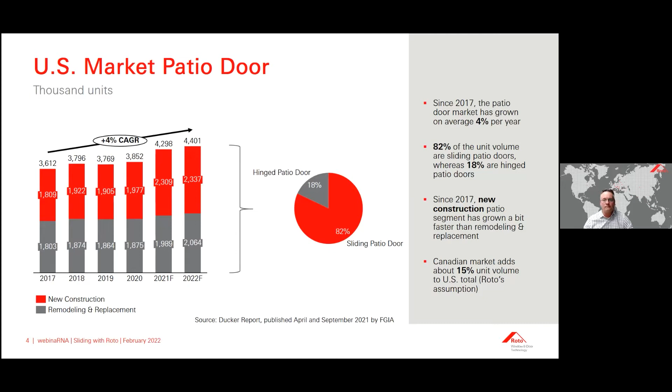Now, if we hone in on the sliding patio door market, it's very interesting to note that from 2017 to 2019, the sliding patio door market grew at 5% per year. And we believe 2020 and 21 will be shown to have grown at a much higher rate. The next Ducker report we expect will be released in the coming months. 26% of the sliding patio doors are multi-point hardware, and this number is increasing based on the growing demand for higher performing doors.

It's interesting to note that patio doors are growing at almost 2 times that of windows in North America. And the vinyl PVC frames account for about 2/3 of the unit volume. It's also important to note that in Canada, it is common for a window manufacturer to purchase their sliding patio doors from a PVC extruder. This is much different in the United States, whereas most window manufacturers will produce their own sliding patio doors. And again, we make the assumption that the Canadian market adds about 15% to the US volume numbers.

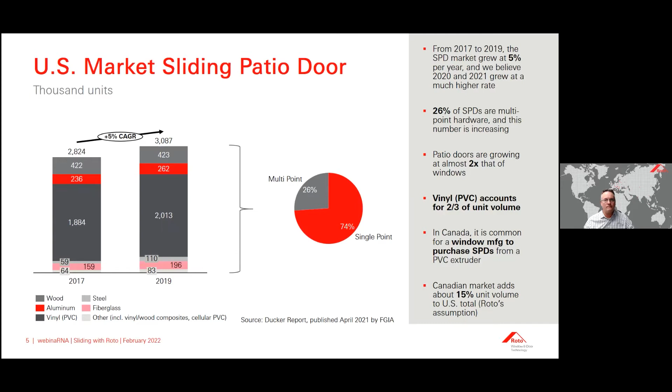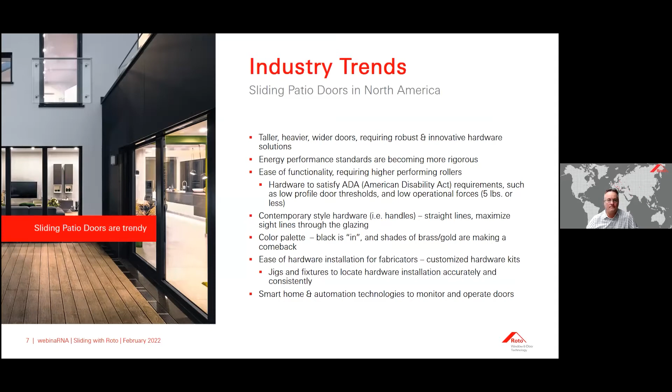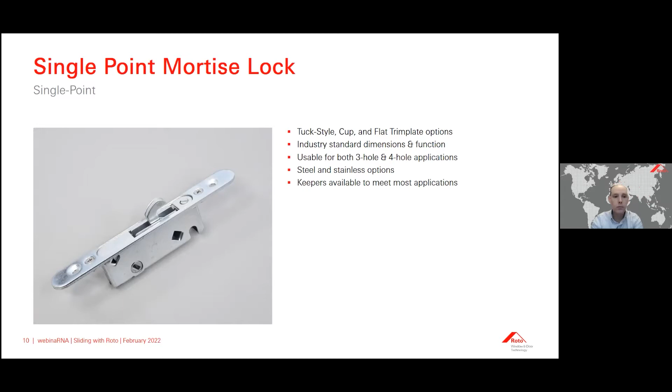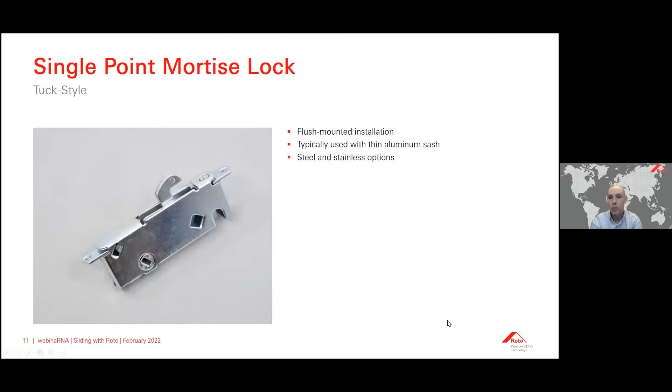Tuck style: this is a flush-mounted installation typically used in thin aluminum sashes. It reduces the gap between the keeper and the sash when needed. Cup trim plate: where a cup trim plate is possible, it pushes the hardware deeper in the sash, allowing more overlap of sash and frame and preventing handle and frame contact. Typically, this is used on a deeper backset, such as vinyl or wood profiles.

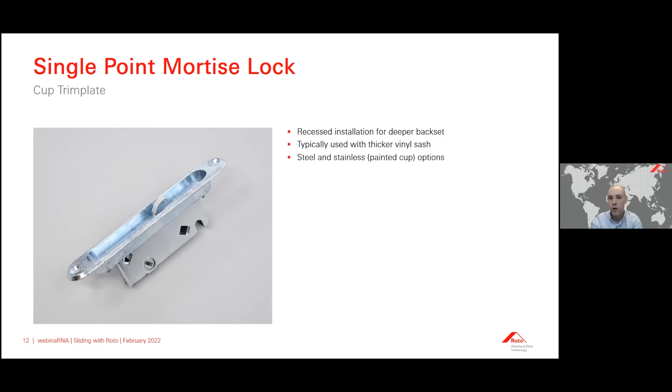And flat trim plate: surface-mounted installation is most common. Two screw hole patterns, highlighted in the pictures shown, are available to replace the majority of existing hardware applications.

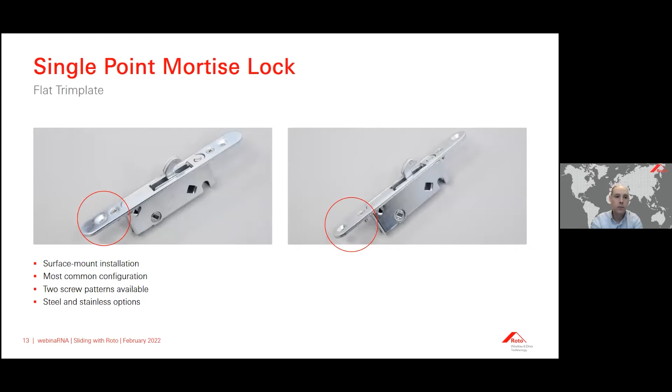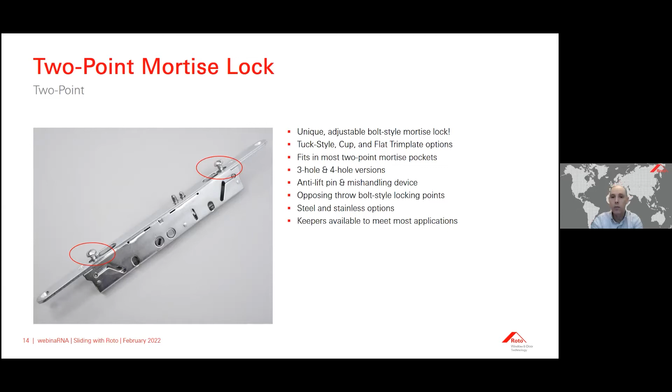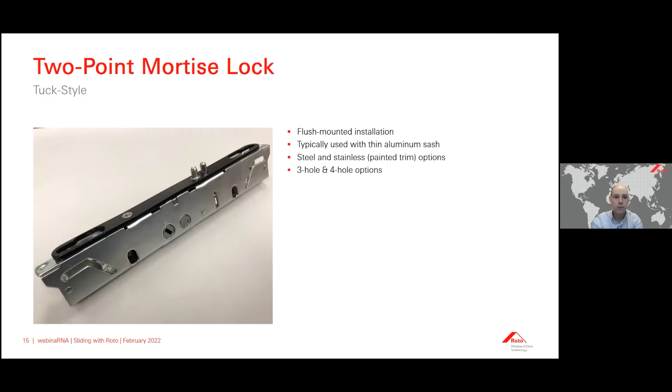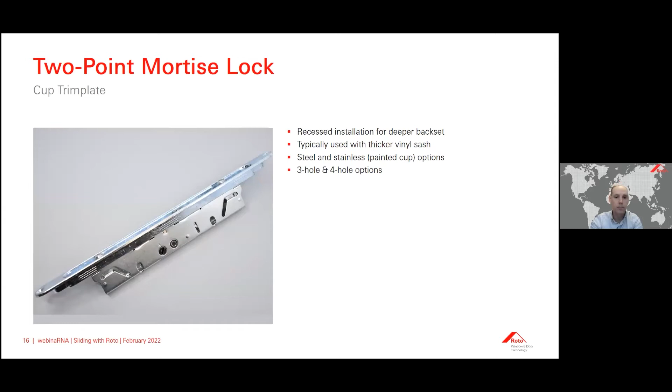Tuck style, as with the single point, flush mounted installation typically used with thin aluminum sashes. Cup trim plate, where a cup is possible, pushes the hardware deeper in sash, allowing more overlap and preventing contact. Typically used on deeper backsets in vinyl and wood. And flat trim plate, definitely the most common surface mounted installation, and the footprint fits in most existing hardware applications.

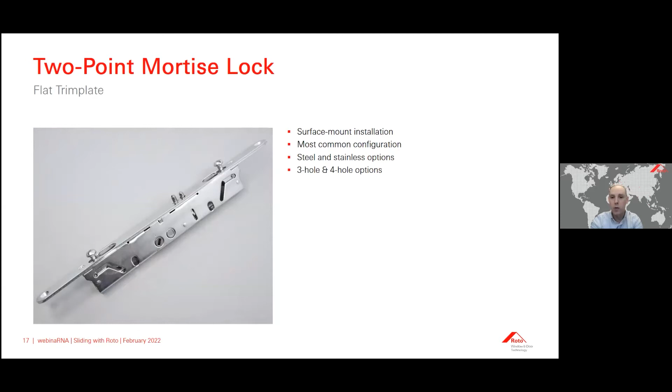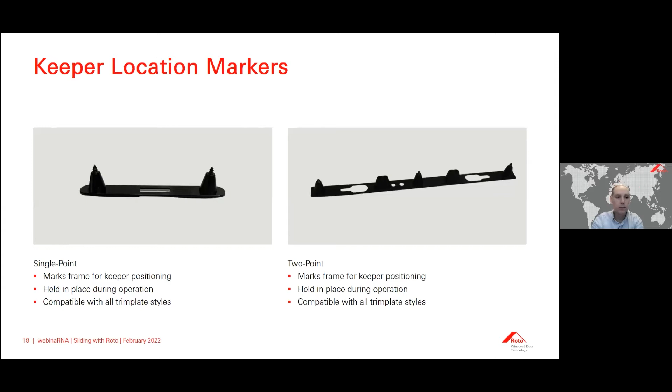We also provide keeper marker locators. They're usable when keepers are not installed in the factory. They easily mark the frame for keeper installation in the field. Next up, we'll look at our 2-point operation and keeper marker installation video. If you just want to start the video.

So as you can see in the video, the bolts rotate outward in opposite directions for maximum security. An anti-lift pin and mishandling device prevent operation if the door is not in closed position. The keeper marker is easily installed by rotating the thumb turn to secure the marker in place. Simply closing the door will stamp screw hole positions on the frame. Retract the bolts to release the marker.

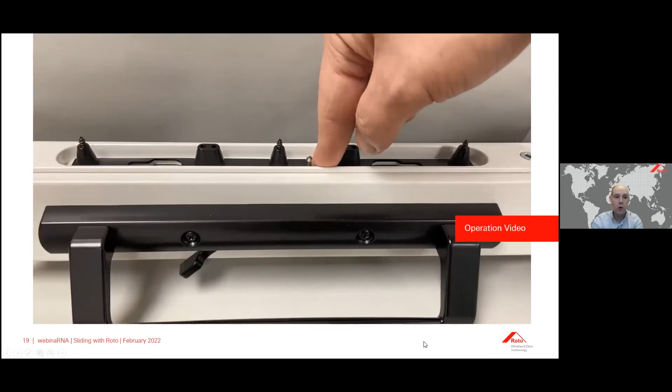Next up, handles. Handles are zinc die cast and powder coated at our Mississauga, Ontario, Canada warehouse. Architectural finishes are imported and stocked in Mississauga as well. A variety of visibly familied series of handles exist with keyed, non-keyed, and dummy options available.

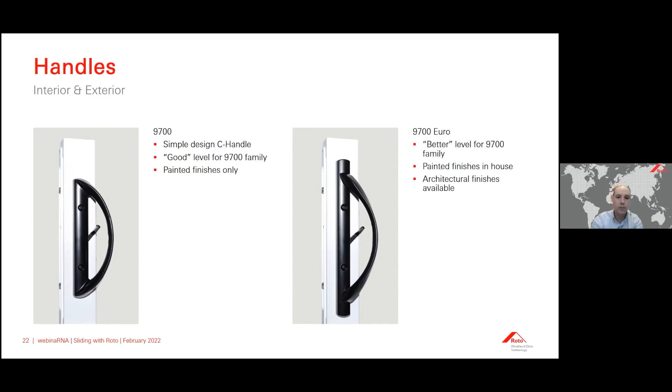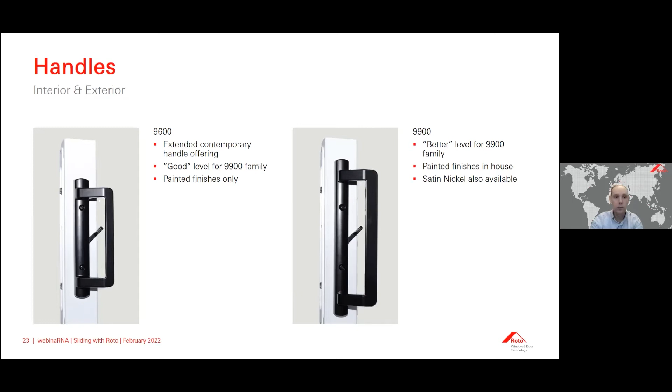As doors are becoming larger and heavier, more robust hardware options become necessary. Our 9100 family accomplishes this. The 9100 offers slim form factor and is compatible with magnetic blinds, allows greater sight lines, more glass, and wider opening while still providing a pronounced contemporary handle suitable for larger doors.

The 9100D is a more robust full D handle when trends for larger and heavier doors are becoming prevalent. Both options are available in powder-coated finishes and satin nickel finish.

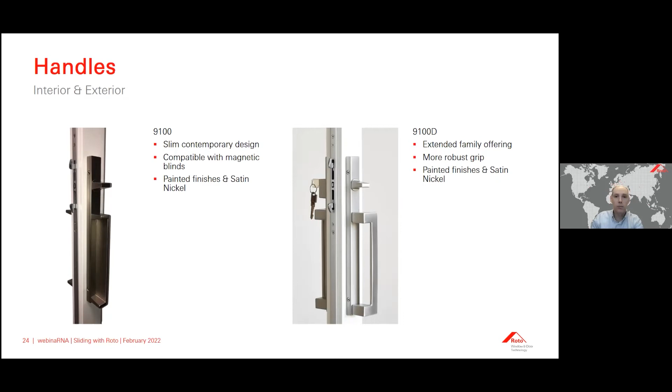We also have an array of exterior handle options. Exterior finger grips have a slim form factor, allowing greater sight lines, more glass, and wider opening. An angled finger grip version slants the keyhole away from the frame. These are available in powder-coated finishes.

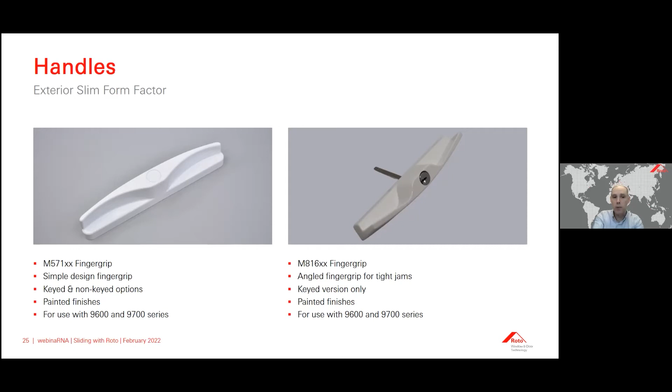Exterior low-profile finger grips have a slim form factor, allowing greater sight lines and wider opening. They also have a shallow depth, which prevents contact with screens. Available in painted finishes.

Next up is rollers. We have a couple main end adjust rollers. Our two most common end adjust rollers are the 21000 and 21009 series. Both have a 1 1/4 inch wheel. The 21000 is end mount, and the 21009 has mounting tabs on the housing for securing to bottom of the sash. Adjustment with both is with the Phillips driver bit.

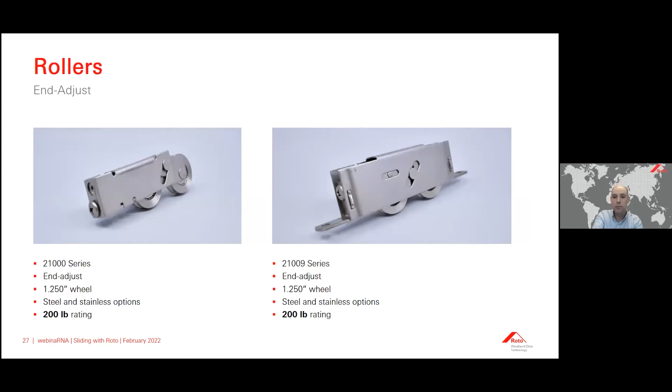For side adjust rollers, we have a number of options. Our 21008, our most common version, has a 1 1/4 inch wheel and wedge adjustment. We have a larger wheel version with a 1.812 wheel, stainless. Both have a 250-pound rating, and both have Phillips standard driver bit adjustment.

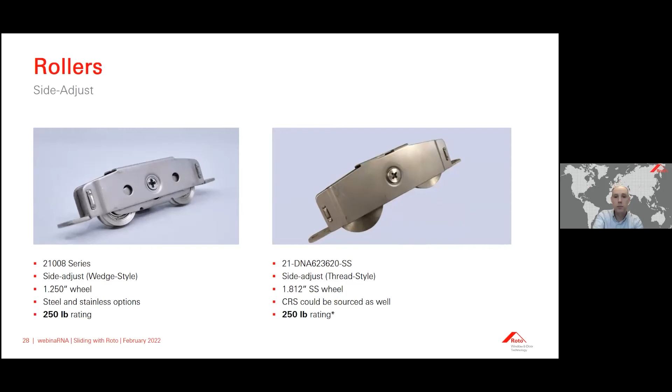A heavy-duty option is also available. The DR07 series has a 2 1/8 inch wheel and meets 400-pound sash weight requirement for many larger, heavier door trends. Adjustment is with the Phillips driver bit.

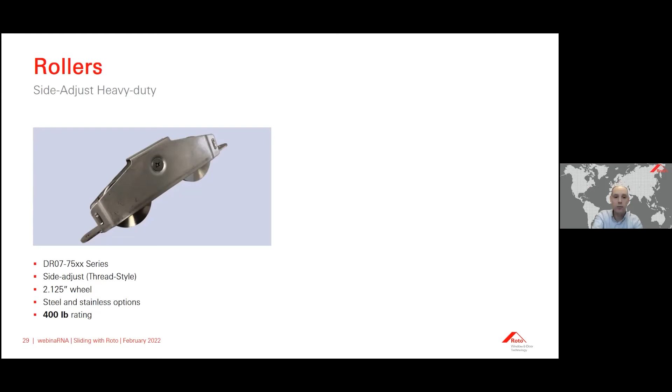The last accessory that we'll look at is the footlock. Footlock's an additional lock for your sliding patio door, provides a semi-secure night vent option for airflow, face-mounted lock with two backset options, 1/2 inch and 3/4 inch, and a variety of sill-mounted keepers in steel and zinc powder coating to match your handle and footlock together.

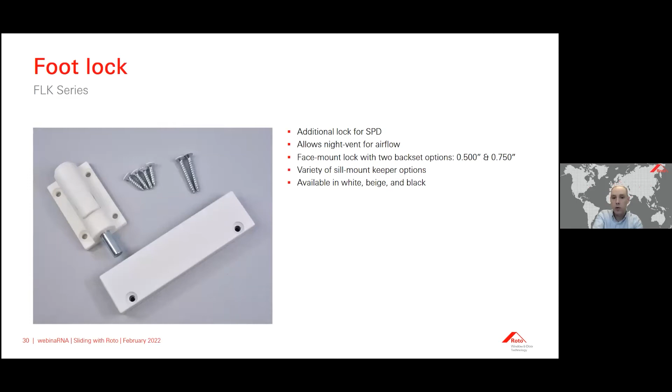Let's now talk about Roto FTT, our window and door technology division, German-made. Founded in Stuttgart, Germany in 1935, Roto is the global leader in tilt and turn hardware technology. This was achieved through innovative, experienced, value-adding engineering skills and fast, streamlined, precise supply chain management. When you see German made, think robust, reliable, durable.

Qualified specification by working and warehousing close to the customer, accompanied by digital tools and configurators, bring added value. Roto's systems expertise yields specific, interconnected, economical hardware solutions. This has all led to the development of the innovative smart sliding hardware system. And here is Bill Shipman, our product manager for Euro products, to tell us more.

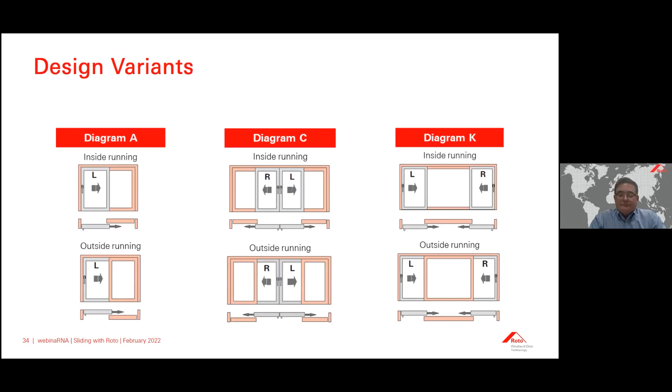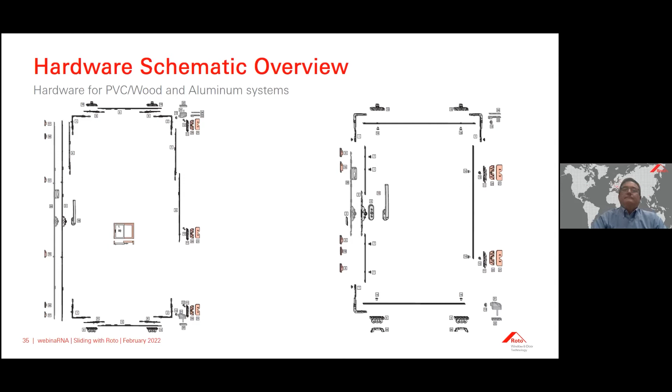Within the Inowa product family, there are two different systems that we're going to talk about today. The Roto Patio Inowa 200, which is our current product in the market today, has a 200 kilo or 440 pound weight capacity. And the Roto Patio Inowa 400 system, our new system, will be available approximately at the end of May this year. This new system will allow much larger sashes and weights up to 400 kilos, which is 880 pounds.

There is a larger application range due to the aspect ratio of up to 3:1 width to height, with a tilt protection device. It is important to note that if you use the tilt protection device, it cannot be combined with the soft close functions, which we'll get into in the next few slides.

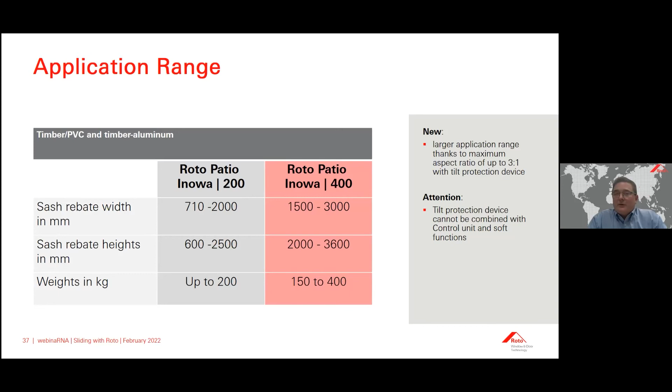So the Roto Patio Inowa system has a circumferential gasket and hardware with active locking points all the way around the sash, including inside the mullion. It has reliable and secure functionality, with secure locking points thanks to the V cams and the locking cams. There's an anti-pushback function in the mullion, which prevents lateral movement of the inactive sash in a Diagram C or French unit. It also offers a locking handle with drilling protection for extra security.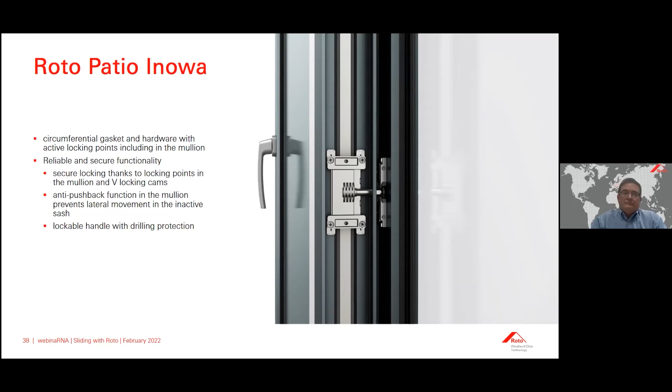from the frame. The next slide you'll see is with the handle in the closed position, and that sash will move about 8 millimeters over towards the frame, compressing that circumferential gasket, which gives you the very tight sealing feature of the Inowa system. So if we toggle back and forth between these two slides, you'll see the movement of the sash in relation to the handle.

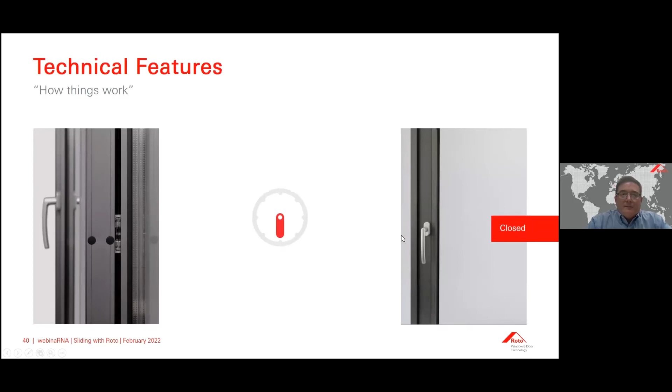In this slide, we're going to show you just a quick operational video, which shows the movement of the sash and how the hardware will actually move the sash laterally to and from the gasket. You can see the handle going in the up position, which allows the sash to open. And here you'll see a close-up of the sash, giving that 8 millimeter movement towards the frame, which compresses that circumferential gasket.

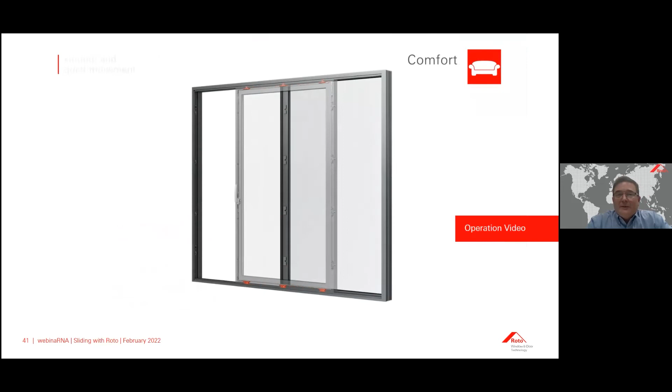And that movement is controlled by the activation of the handle, which activates the hardware down to the roller, which makes that sash push towards the gasket.

Billy, I'm going to play that one more for our guests because I think it's an interesting video and it doesn't take too long. Absolutely.

Again, you'll see the handle move to the up position, which unlocks the locking points and allows the sash to move. And there you'll see the sash movement to the frame. It's important to note when the sash is away from the frame, the only friction at that point is the rollers. So very, very heavy sashes move with great ease.

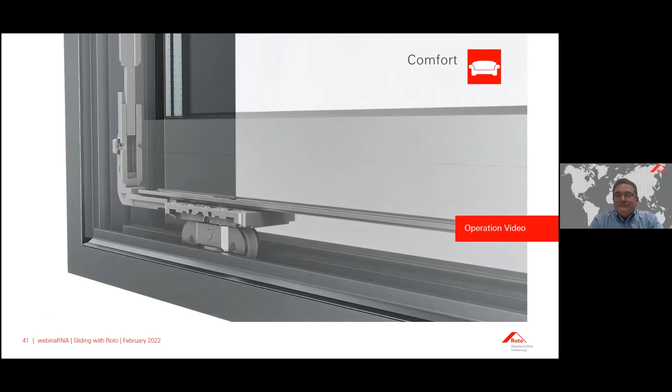Fantastic. So we're going to talk about the Patio Inowa soft functions. These are an accessory item that go in the top end of the sash. And the soft functions protect the entire sliding sash element through mechanically controlled braked opening and closing, so the sash doesn't slam into the frame upon closing or the mullion upon opening.

So the soft open and soft close can be combined together even on one sash. It's suitable for sash weights up to the 200 kilo system. And for sashes that are between 200 and 400, Roto makes what's called a soft stop feature, which is a braking system, but it doesn't move it into the final closed position. The soft close and soft open functions can be used for all profile materials: aluminum, PVC, timber, and timber aluminum.

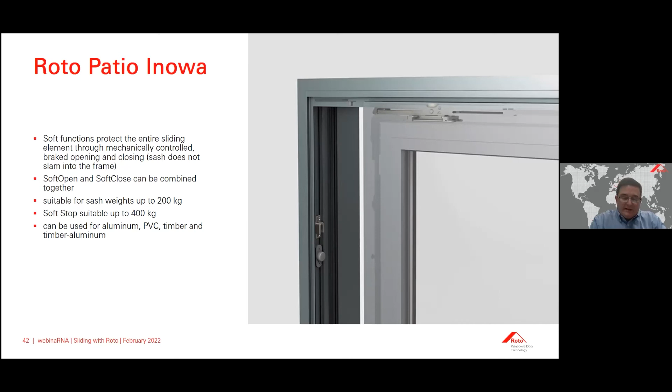So at a glance, we take a look at the soft close function. The soft close function gets installed on the handle side, and it gently brakes the sash and then brings the sash into the closing position or the end position, where you can then just rotate the handle and the unit will lock. The soft open function goes on the mullion side of the sash, and it brakes the sash after the opening and pulls it into the final open position.

So some of these sashes get quite heavy, and if they roll, you definitely don't want them slamming into the frame, so these protect the sash from hitting the frame or the mullion, and provide gentle closing.

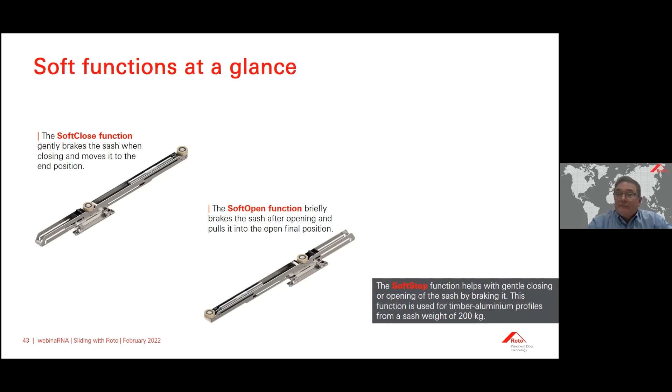Here you can see the soft close or soft open installed in the upper rail. And for up to 200 kilo sash, you have the soft close, which goes on the handle side, or the soft open function, which goes on the mullion side. From 201 kilos up to 400 kilos, that's where you have the soft stop function. The soft stop function will brake the sash gently, but it won't bring it into the final position.

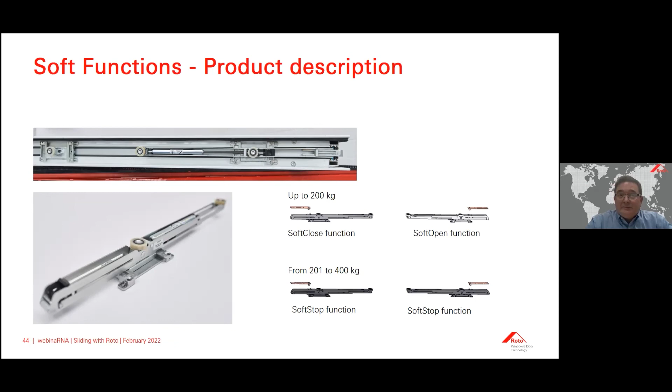For the Roto Patio Inowa 400 system, this is the system that will go up to 400 kilos or 880 pounds. Roto has come up with a new roller at the bottom end of the sash. This new roller utilizes 13 millimeter grooves for the hardware. It provides an effortless and very robust hardware system. This roller has a height adjustment. It's a -1 +3 adjustment for a total of 4 millimeters. And it also has integrated brushes, which keep debris off the track and keep the roller moving very smoothly.

So to summarize the Patio Inowa, there are some advantages here. It is a smart sliding system. It's simple and convenient to use. It's a tightly sealed system, ideal for urban environments. It provides secure functionality. There's a wide variety of formats, different profile materials, and design variants, simple and efficient installation, and it has exclusive design without visible hardware components.

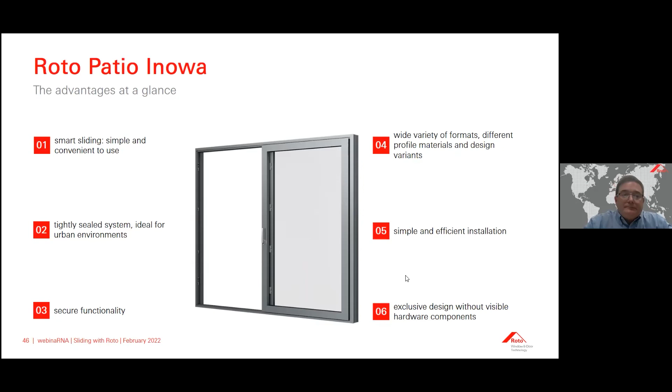And that concludes the Patio Inowa presentation. Chad and Bill, thank you very much. I think you've provided our audience with a great overview of Roto's product portfolio for the sliding patio door segment. Basically, we can take a fabricator from a good, better, best scenario all the way up to an innovative premium solution in the North American marketplace.

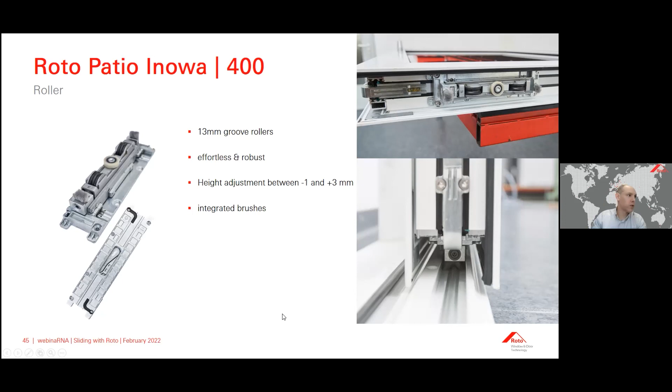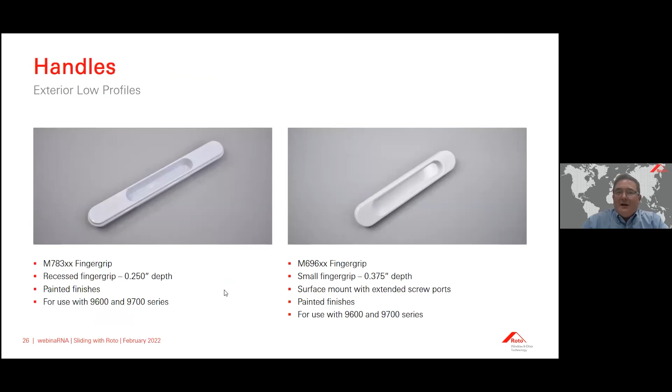And then there's a second question from Kurt that says, are there any plans to add adjustments to the strikers of the 4-point mortise lock similar to the mushroom head on the 2-point lock? Is that a question for Chad? That would be a question for Chad, yes. Yeah. You're muted, Chad. Just trying to find a slide reference. Okay, would you like me to read the question again? Yeah, certainly. Read the question again. Yeah, it says, are there any plans to add adjustment to the strikers of the 4-point mortise lock similar to the mushroom heads on the 2-point lock?

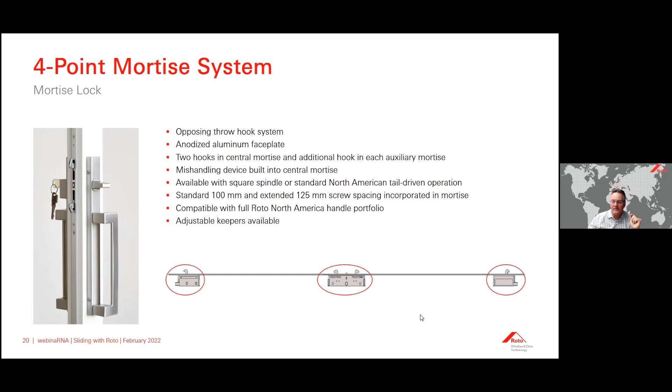And so far, kicking off this program, since the keepers were made available about 3-4 months ago, we have 2 customers in the US who have jumped on this pretty quickly, and we're anxious to see how it progresses with them and what their comments are once they get it into the field for a few months. And we'll be happy to provide any feedback after we receive it.

Bill or Chad, you see anything else? Because I don't see these questions in my chat. Nope, these were the only 2 that I had on my side. Okay.